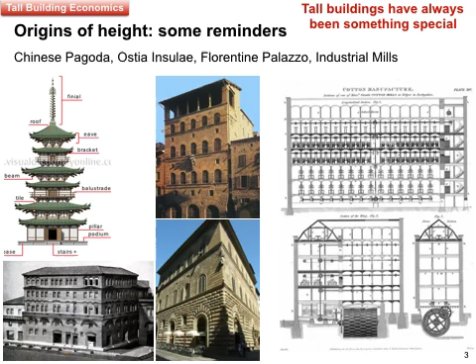The modern tall building era starts in 1885 with the Home Insurance Building in Chicago, but very few people realize that at the same time there were buildings nearly as tall with metal frame built for residential use in New York and another one of mixed use in Chicago, the Pullman building. Why did this happen? Well, there was a period from 1870 to 1900 of manic technological innovation and urbanization and immigration to America, a quest for profit that has never been seen before, but could be said to be echoed in China at the moment.

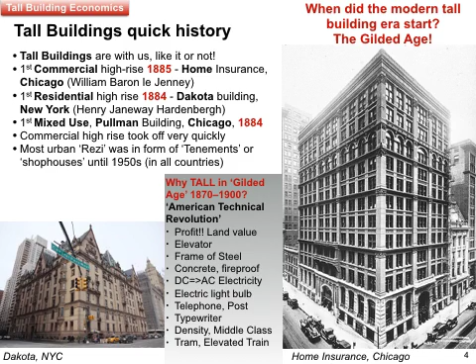The things that were really changing for tall buildings were the inventions such as the elevator, the steel frame, the concrete frame for fireproofing, AC electricity, the light bulb, telephone invention, universal postal sorting, the typewriter, increasing density, a growing middle class, urban transport systems based on electricity such as the tram and the train, and of course the first clients who could need tall buildings would be insurance companies. Most of the first tall buildings are insurance.

What do we mean by a tall building? Very quickly, the CTBUH defines tall building by several ways, one of which is simply, is it high relative to its surroundings? Does it contain technology that is representative of tall buildings, such as special elevators? Is it higher than it is wide? And if it's extremely high, does it contain special protection against wind and earthquake? We also make a difference between functional tall and iconic tall.

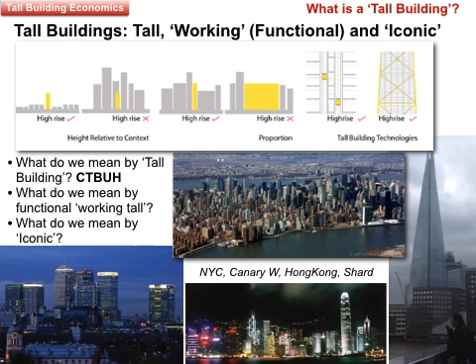In the first period of tall buildings, they fitted their site pretty tightly, and they had light wells, and of course no air conditioning and very primitive light bulbs. So they had large windows, masonry walls, and daylight cores, and fresh air ventilation, although they already had primitive forms of mechanical ventilation. This system of defining generations was devised by Philip Oldfield and Dario Trabucco.

After 1916, there were zoning laws in America which tried to improve the quality of daylight in the streets and required buildings to be set back or to get smaller as they rose taller. And this produced a ziggurat-shaped building with a centre core, but they still filled the site entirely. If you walk around the Empire State Building, you won't be able to see it because it has very tall podium buildings which obstruct the view of the tower.

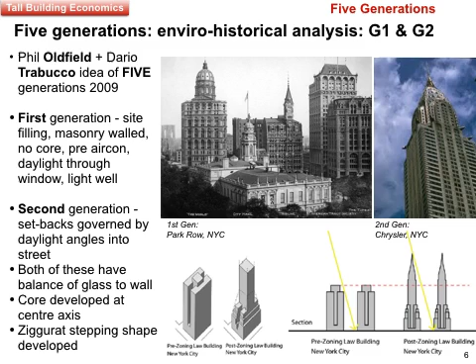The third generation started after the war with the development of glass and air conditioning, and Mies van der Rohe was the philosophical tutor of this movement, and SOM were the driving force as a major practice with some of their great buildings. We had cheap energy, air conditioning, plenty of steel and glass, and there was a belief in breaking away from Art Deco and going for the pure beauty of pristine shapes in the sky, pure cuboid forms. Because of solar gain, the glass was almost always darkened or mirrored, but it was always single glazed, and it needed a lot of artificial lighting indoors, which reduced daylight.

As we moved on in the late 70s and up until the present day, we are far more conscious of energy, so we have double glazing and some double skin facades. We take much greater effort to control solar gain with louvers. We try to bring in natural ventilation, and we have other variations on double skin facade. But one should say that the previous generation and this generation seem to disregard the climate, and you will find fully glazed buildings in Singapore, Jakarta, Shanghai, Manhattan. Everywhere you see these buildings, and they do not adapt to their climate fully.

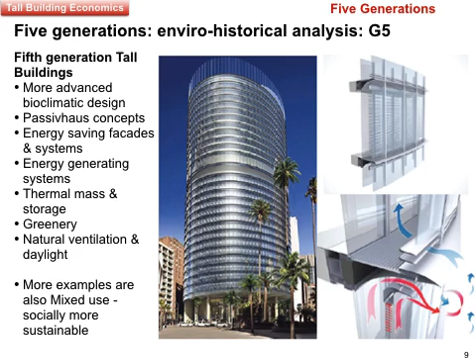Going on to the fifth generation, we have buildings which are minutely considered in every way for their climate, and will also integrate many technologies to make them more eco-friendly, such as bioclimatic design concepts of ventilation, daylighting, even passive house concepts for insulation, facades which save energy or generate energy, thermal mass in the floor slabs, lots of greenery incorporated into the building, ventilation, daylighting in atria, and quite often mixed use instead of being single-use office buildings or pure residential. There are numerous examples in this generation, and some of them are so extreme in their application of technology, we might even call them sixth generation.

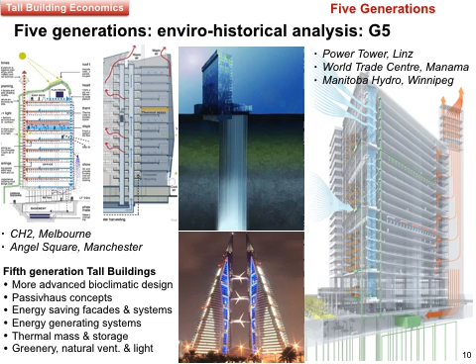We should remind you of the difference between tall buildings. The ones like Burj Khalifa in Dubai are exceptional and not typical. And what we are concerned with really is the majority, the millions of tall buildings of reasonable height, which accommodate vast numbers of people working, living, shopping and learning, and are responsive to the 20th century context of population, density, transport, etc.

One of the most seminal books on early history is Form Follows Finance by Carol Willis of the Skyscraper Museum. She writes up until the end of the Art Deco period and makes the point that there was a kind of development craze in New York to build profitable buildings almost regardless of having a client. But the shape of the buildings was pretty well the same, whatever was inside it. The form was defined by what the site could take within the zoning law regulations. The old form follows function doesn't apply with tall buildings.

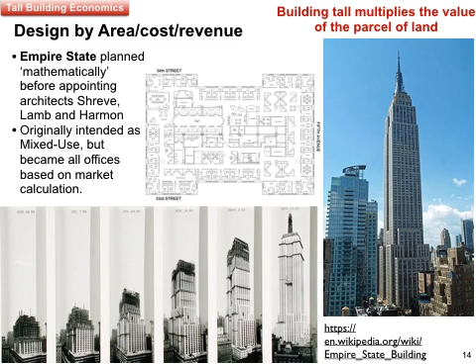Something like the Empire State Building was designed as a pure mathematical planning exercise to see what would fit on the site before the architect even got invited to start wrapping a wall around it.

So economically, a city which is not under high population stress can always build up to 7 to 9 stories. The average height of buildings in Bloomsbury, in Paris, in Berlin, in Barcelona, and much of Manhattan, and they achieve high density. I should say also much of Hong Kong is up to 9 stories. But as land values, population, wealth and transport push harder, buildings have to go higher. Every time a building is decrepit and replaced, it must be taller than the previous one to get the money back on the cost of acquisition.

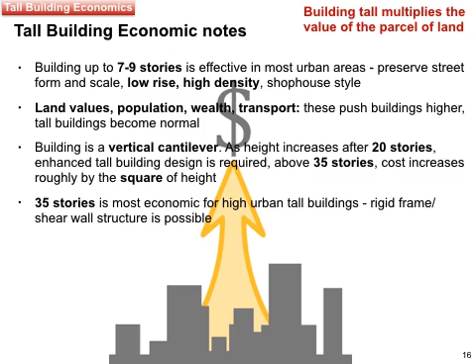As you go taller, the economics get worse because the relative core size increases relative to the floor plate as the building gets narrower. And your costs rise because everything, structure, facade, core, MEP, the foundations have to be safe against failure. With every 100-meter increase, there is a hyperbolic increase in cost. Having said that, the economies of scale allow you to invest in special structure, special elevator systems, technologies, renewables, which is a good thing about tall buildings.

Existing tall buildings have cost a lot to build. If after 30 years we wonder what to do with them, we must consider that it could be most uneconomic to knock them down. Maybe we should refurbish them. You see here that Hudson Yards is what is being built over the Penn Station rail tracks. There is no way, with the massive investment in roofing over a working railway, you could cover this with buildings of average urban height.

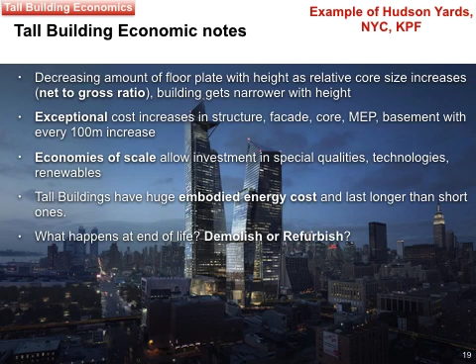So I said that a building is like a cantilever. The bending moment is proportional to the square of the length. And the same thing applies to the building, approximately. The cost and the complexity increases according to the square of the height. The land is expensive to put together. There are very high initial costs in negotiation, and that's just before you get started with an actual building.

There are massive amounts of design required to get the building right because it will last 50 years or longer. And there are what are called externality costs, which is the surrounding urban structure, the roads, the underground railways below it, the relationships to open space.

And it can take something like 10 years to get permission to build tall when you have to do so much work with consultants and city governments. There are very high costs up front with professional costs, many people required to take part.

Having built a building, you don't just sell it, you actually get a continuing income from it. Even if it is residential, there are high monthly maintenance fees and charges. There is a revenue stream for the owner, even for things like parking spaces, which are a good source of income, but they should almost always be underground.

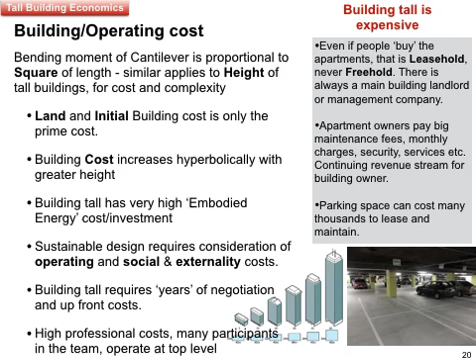One thing it seems is that good design is worth paying for because you are building something to last for a very long time. And marketing comes into it, that if it's well designed, it's easier for the developer to get tenants, and it's almost always paid off. Good clients are aware of this and will consider long-term revenue and marketability of the building over the long term.

But one should always remember that after 30 years, there may be a complete rethink about the function of the building. Maybe it should be converted to residential, but can it be knocked down? It is far too difficult to get your money back. If it is already tall, the only way to get your money back is to build even taller, and that may not be possible for urban context reasons.

One thing to remember is that commercial buildings have a completely different cost and occupancy from residential ones. They need far more elevators, wide spans, whereas residential buildings are partitioned, which can be structural partitions, fireproof partitions, which change the economics completely. Residential ones are also less subjected to recession because people don't tend to move in a recession, they sit tight, whereas office tenants will often panic and leave.

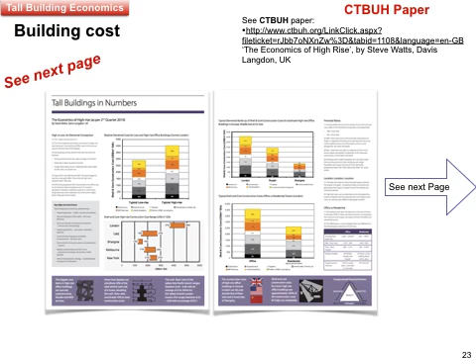So this is an interesting paper from the CTBUH. It's a 2-page paper. I'll quickly run you through it. It shows you here the typical elemental costs between a typical low-rise, a high low-rise, we're talking about 9 to 12 story or up to 20 story, and a high-rise. And you can see here that the costs expand on all those because of extra precautions required in building tall. MEP is about the same. Higher cost in lifts and escalators, as you'd expect.

Whatever you are building, the shape and geometry will have a big impact on the cost, the iconicity, the slenderness, the size of the floor plate that you can achieve affects how you can market the building. Where do you put the core? What methodology is there for building it? Are you in a city centre and having to build it always between midnight and 6 a.m.? How complex is the facade? We don't like big flat glass facades anymore. We expect more articulation, complexity. Also, we expect environmental strategies and sustainability features in the building, which will increase its cost but will extend its sustainable life.

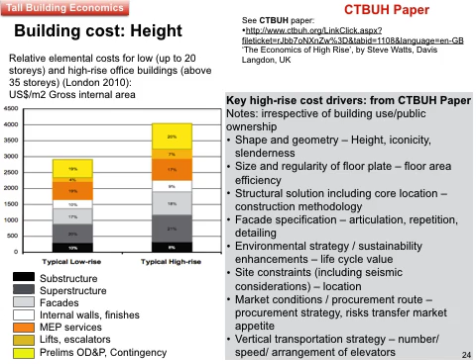You consider the site constraints, including the seismic consideration. You consider the long-term market conditions for operating and running the building. And the vertical transportation strategy is important. If you have a single-use building, you can of course plan elevators to serve that one purpose, but in a mixed-use building you are considering retail, parking, servicing, residential elevators, maybe shuttles to a club on the roof. All sorts of complexities come in with vertical transportation.

So offices tend to cost more than residential because they have a higher standard of finishes, longer spans, and the tenants expect to get a finished product, whereas residential, a lot of the furnishing is done by the occupants. And there's less MEP in residential because the occupants can open their windows.

Also, you can't fix down the price of a tall building because it depends where you are. In China, there is a lot of cheap labour and a great deal of expertise at building tall buildings, so they are cheaper. In London, you have very, very high operating costs with the city around you being congested, and builders are, I'm not saying that they're inexperienced, but the thing is you have to get in the queue for the really top level contractors to build your building. You have a higher substructure cost because under London you have a whole mass of tunnels.

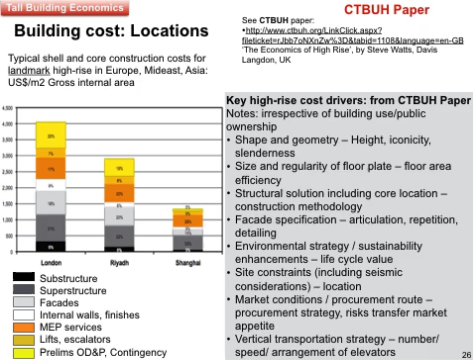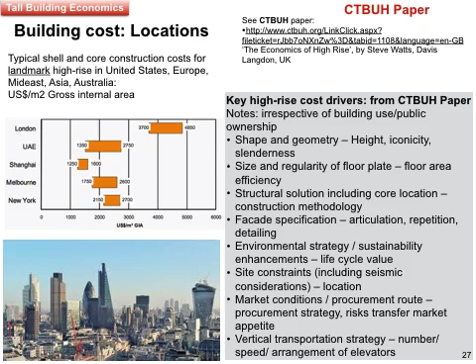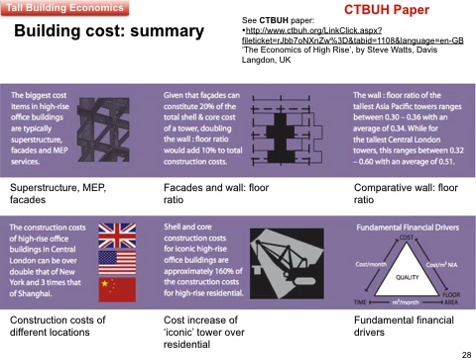This slide summarises some of the key ideas about superstructure, facades, the wall-to-floor ratio, the construction costs in different locations, the cost of becoming iconic instead of functional or residential, and the triangle of the fundamental drivers of time, cost, and area.

Another important concept is net to gross ratio. The gross is the total area of the building. The net is what you can charge rent for. So you can't charge rent for the thickness of the wall or the amount of core or the toilets or the service shafts. So you try to get a ratio between those two, and something like 60% would be considered very inefficient.

85% is only possible with a smaller tower of single-function offices, and most buildings will go for somewhere between the two. Owner-occupiers, like banks, are often happy to get a less efficient building but with a higher quality of space. A speculative building will have the client asking for a maximum ratio because they're not concerned with quality.

So theoretically, as you're multiplying site with height, more floors would appear to be more profitable, but this is not always the case. The higher you go, the deeper you need foundations, the bigger the core, the less floor space you have for renting. The facade is larger relative to the floor space. The M&E are greater. There is a hyperbolic cost increase.

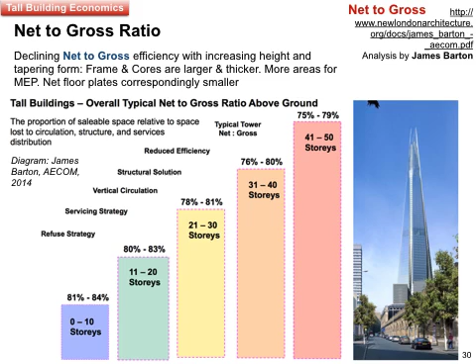This also shows that one of the more expensive parts of a building, the facade, there is more of it as you get taller, quite logically. As you go taller, the building size must get larger in plan for stability reasons, but people like high floor-to-floor heights, and there will be a very expensive facade, and the upper levels of facade are getting more battering from the wind, and there are more issues about safety with a swaying building.

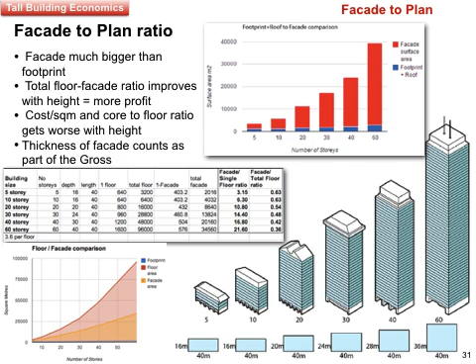If you have a single offset core, you can subdivide the floor, but you have longer escape distances and the risk of dead legs. And you also have a higher facade cost, because the facade needs to balance out the stiffness of the core. Sometimes you have an atrium core, where you have what might be called a twin core with more space in the middle, but this is going to improve the quality of environment but will reduce your net to gross ratio.

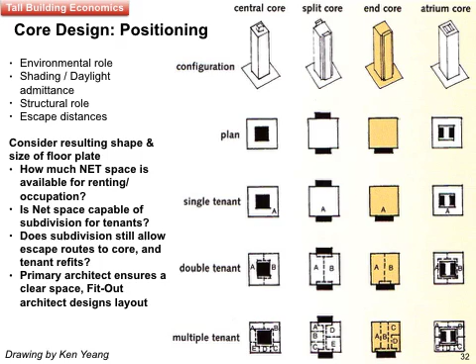One thing to remember is that you may be the primary architect, but you may not be the fit-out architect. For example, with offices, you should always ensure that there are escape routes and options for laying them out as open or closed offices, but it will be another architect, the fit-out architect, who designs the details of that layout.

It should be remembered that historically there have been surges of tall building, surges of speculation and land value, but they have often been followed by depressions. There were depressions in the 1890s, in the 1930s, in the 1970s. We are now entering a period of unprecedented tall building activity, especially in Asia, but even China is feeling anxieties about how long this growth can be kept up for, and they are even building cities which nobody lives in yet, but which are for expansion of future populations.

At the end of life, some buildings are either faulty in their structure or they are simply in the wrong place. Tall buildings tend to have very good structure. Their errors might be in their quality of the MEP and in their facade. They may simply be better off converted to another function, like residential.

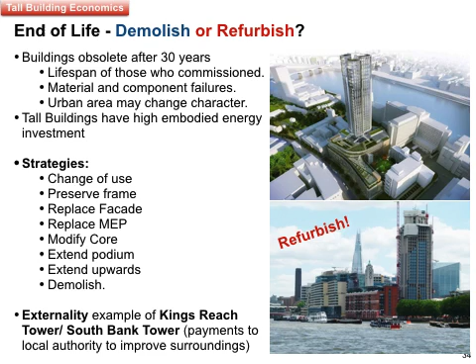The only reason you would demolish such a building is if it has structural failures, such as Drapers' Gardens in London, which was built with high alumina cement and would not last another 50 years. If you must take a building down, this is the tidiest and cleanest way. It's called top-down. You try to demolish the building with minimum damage to surrounding urban fabric and minimum dust, and minimum traffic as the debris is carried away. You try to recycle the materials.